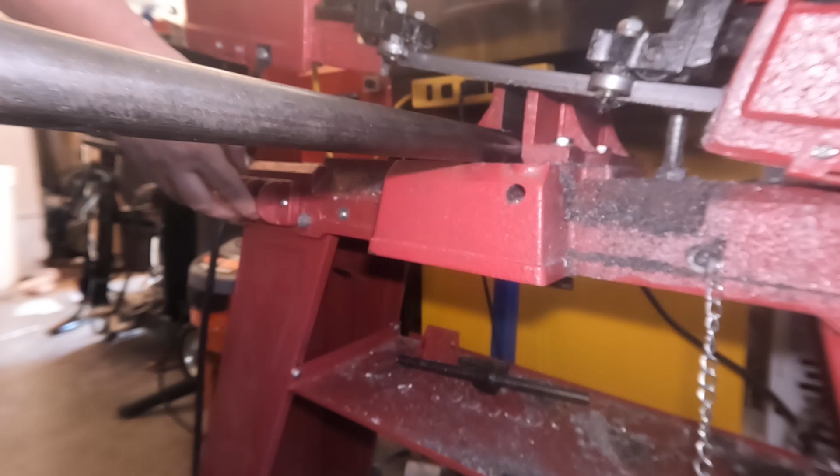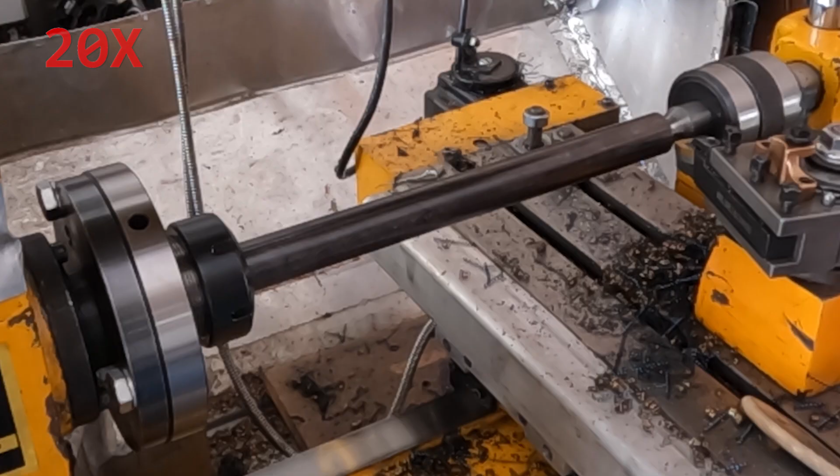Welcome back to my adventures in needlessly making my own parts to refurbish the Anstey Link suspension on my 1949 Ariel VB motorcycle. In this episode I'm working on the guide tubes and sliding member bushes.

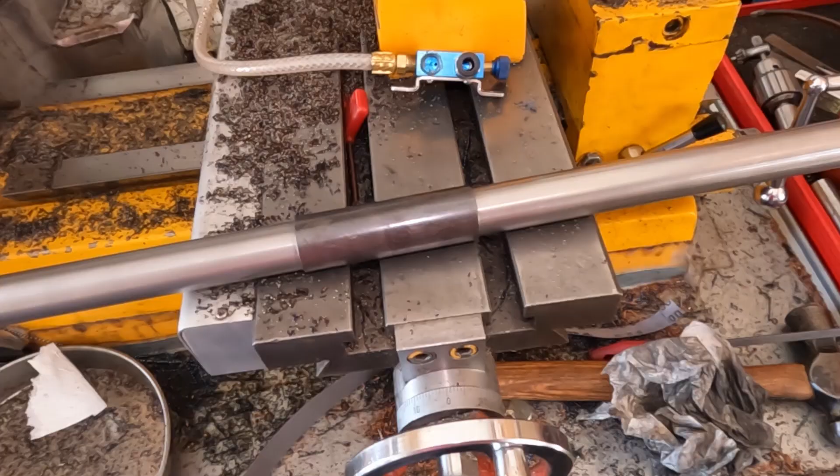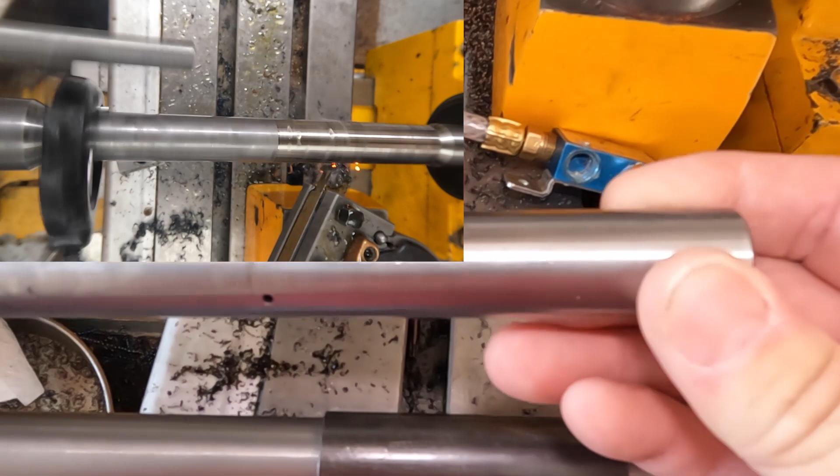So progress has been slow. First I tried to clean up the original ones, knowing it would end up a bit under diameter, but maybe that would be okay. I had a problem with this stuff being really hard, and trying to cut very shallow cuts on it using the carbide inserts really didn't work. Everything was glowing red, and it was catching on the oil hole here as well. So one of these ended up slightly bent, and the other one ended up all scratched up and undersized, but it was an interesting exercise in trying to turn between centers, though I never expected it to work.

So rather than getting mystery metal, I bought myself some 1144 fatigue proof. Bought a 3-foot length of it, cut it in two, so I can get two of these out of each section. I only need two, but guaranteed I'm going to screw some of them up.

And sure enough, this first one that I tried to machine to size got a fairly good surface finish, but one of these ends is 1 thou undersized and the other one's 5 thou undersized, so that was a lesson. The one on the machine here, I took it down to 1 thou oversize and then finished off with the emery strip, which I haven't used before.

I probably should have bought this stuff years ago. It's 400 grit emery, and then polishing it with 1500 wet and dry just for the final finish, and it comes up lovely, all within a couple of tenths of the correct diameter.

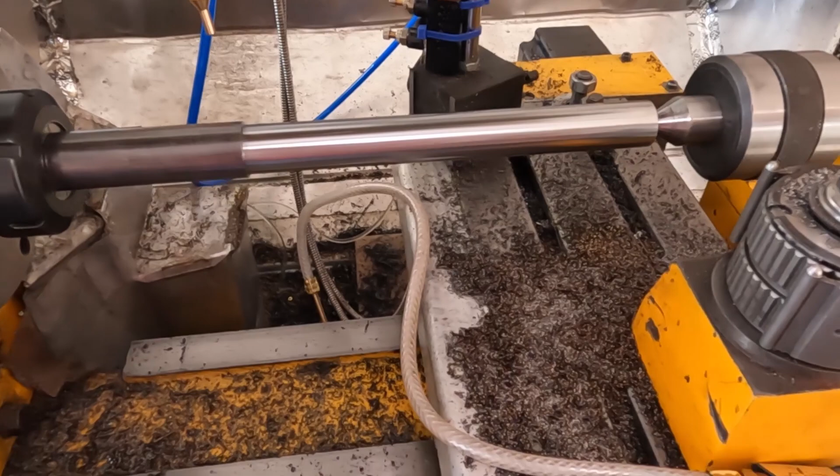Which is 7/8 inch. The reason for this stick out here is on this machine, the width of the table, because it's a mill as well as a lathe, is much wider than you would have on a normal saddle for a lathe, and also the tailstock does not stick out over this thing at all.

So in order to get the reach into here, I have to put the tool over to this side of the table on this slot, and if I do that, I can't actually machine all the way up to the end here, so I have to have a fair bit of stick out here.

Again, compromised machine. It's a 3-in-1. You're kind of stuck with this kind of limitation. But this has now been done on both ends, and it's ready for cutting off.

This slightly undersized one I will also cut off, and I will use these for practice for the drilling operations, so that I can screw up this one before I go to the ones with a good diameter.

This material cost me about 70 bucks. Buying the two parts from Draganfly in the UK already machined would have been £18 each. So this is a hobby for exercise, not for profit. But that's where we're at.

It's taken a while. One of the reasons for the delay was it's getting really terrible surface finish without cooling, and my old Kool Mist, which is the same age as the machine, just gave up the ghost and stopped working.

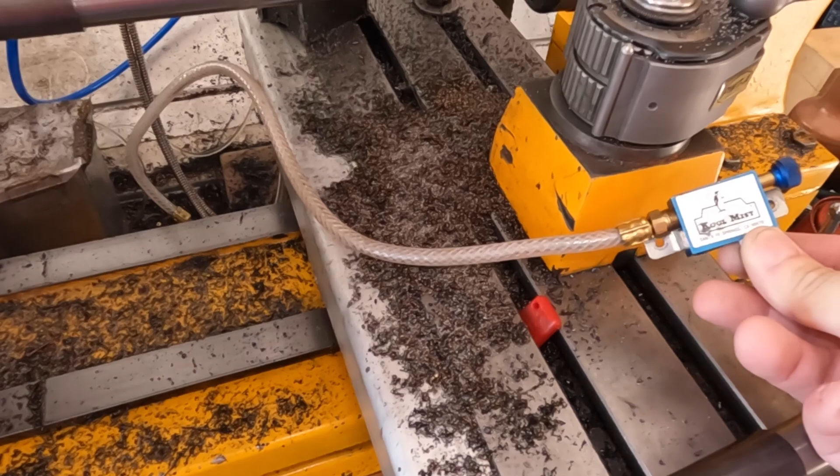I could not figure out how to fix it with cleaning and so forth, so I went to Amazon, bought this thing, which seems to work fine. I have to figure out a better mounting for it, but I need to convert to mill mode to do that, so at the moment it's just cable tied.

But that worked out pretty well, and getting really good cut on this. I do find with the carbide I can't take off less than 15 thou diameter at a time, or it starts to rub and give really horrible results, so it needs to have a reasonable depth of cut.

I probably need to learn how to cut my own high-speed steel tools for this, because that's probably more appropriate tooling for this machine. But that's where we're at.

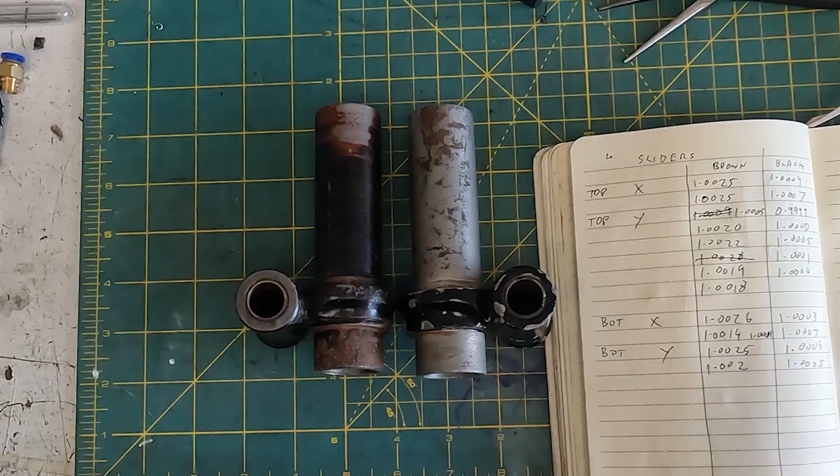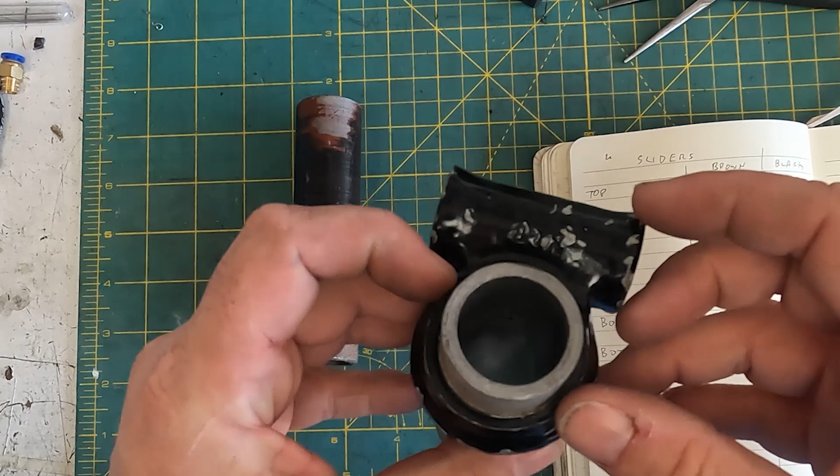So these are two sliding members. Although these are the same part number, they're not from the same years. This one, if you can see in there, there's an oil hole which has been drilled through and then blocked off. The reason for that is they simplified the design, I think around 1953.

They changed the design, 52, 53, and they went from the hardened chromed sleeve here in a bolt to just the bolt. And this bolt doesn't have an oiler in it.

It's not shown here, but there is actually a grease nipple on the top, and then it drills down in the middle, and then there are holes that come out to give grease. There's an indent in that shaft, and then there's holes in this shaft to allow the grease to get out to lubricate that main bearing.

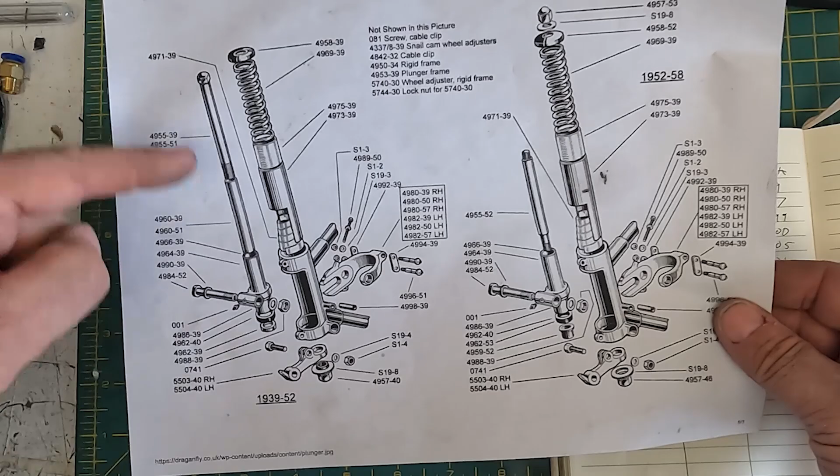They simplified the whole mechanism here and took out that grease point, and instead they added this hole here to grease to the inside.

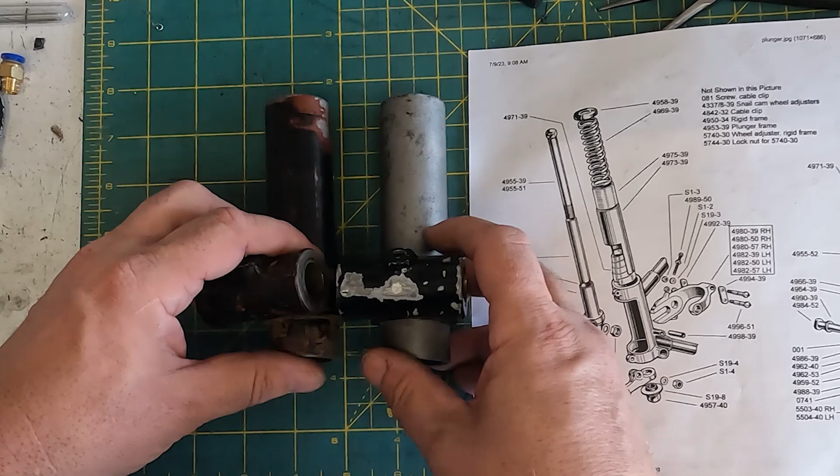I have the earlier everything else, so I can use the earlier type here, and then I'll just have 2 grease points for this side. I could drill this one to be compatible, but I don't need to because I have the earlier setup.

If you do have the later setup here, you do want to make sure that your sliders have this grease hole that's in here. Otherwise you'll have no way to lubricate - you'll be greasing here and there'll be no grease getting through to the main shaft.

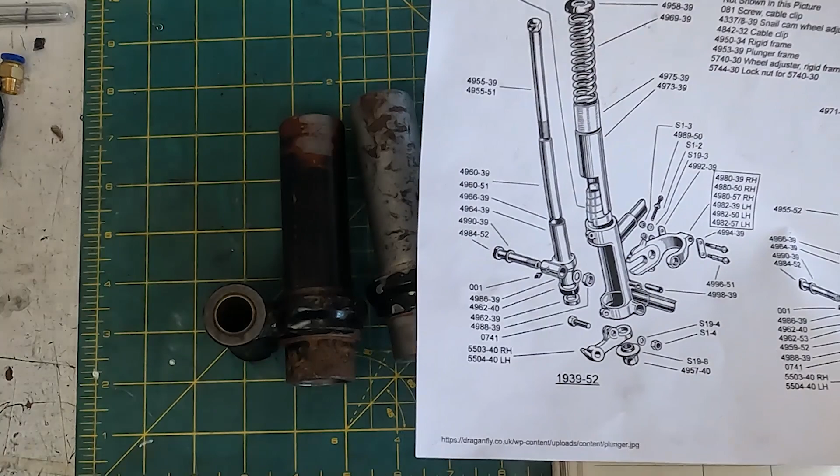So if you are working from a mishmash of parts, or even if you've bought a bike that you think isn't a mishmash of parts, check that you've got at least one of those greasing mechanisms. I'm not going to bother upgrading this one to the later version.

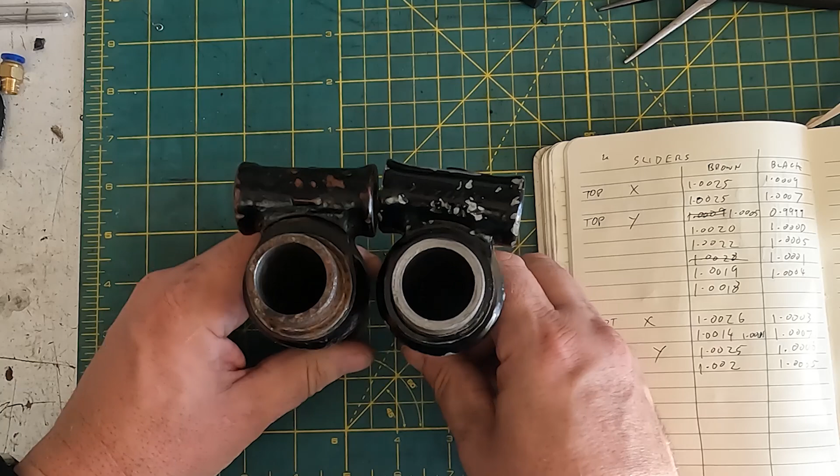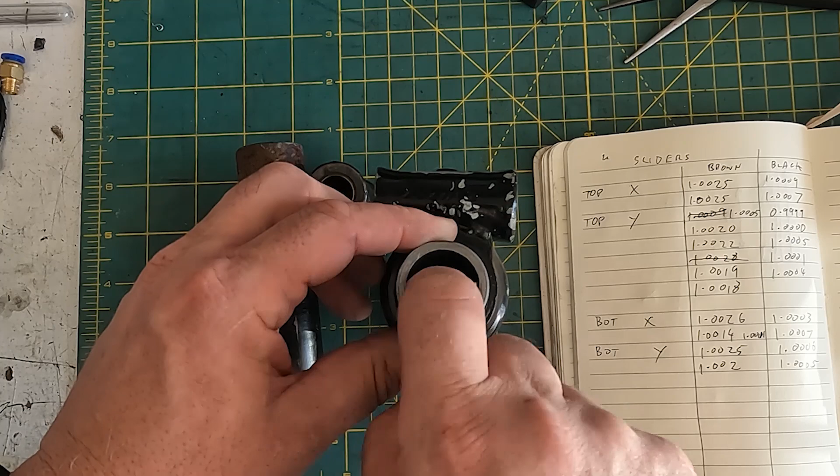It's not necessary. I did check my 2 bores here, and they are not quite the same. They're a nominal 1 inch. This one is a little rougher, and it's about 2 thou over. And this one is more or less spot on 1, slightly over an inch. So this one's about 2 thou bigger than this one.

So when I'm doing the bushings, I want to make sure that I don't mix them up, and I'll make these ones slightly larger.

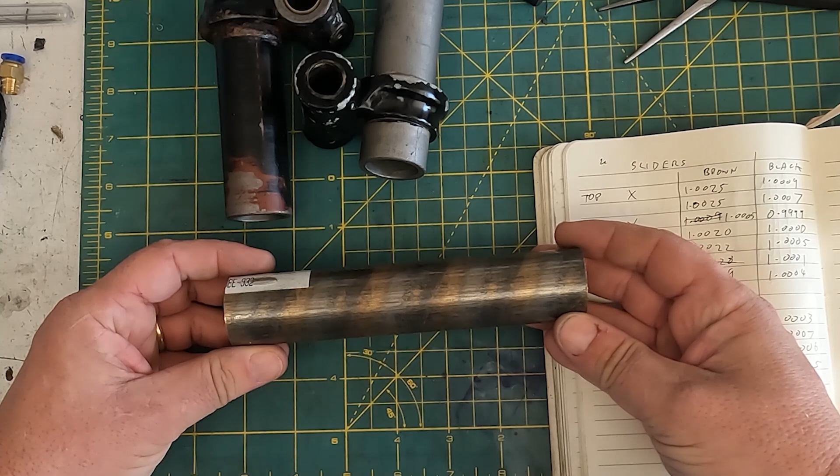This is the material I'm working with. I tried setting it up in the lathe to see if I could grip at one end. I've got enough here that I can make them about 1 3/8 inch long, which I think is about right. I don't have the actual original spec, but from the pictures I've seen, it looks like they're about 1 3/8 inch long, or 1.5.

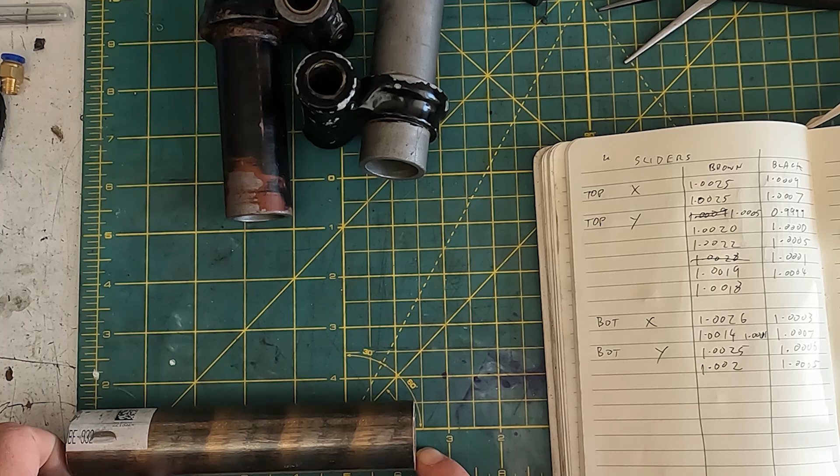So I can get 4 out of this piece, and we're going to take most of this metal away because this is 1 1/4. Our normal outside is 1 inch, and our inner here is only going to be 7/8. So we're going to end up with a 1/16 of an inch thickness bush.

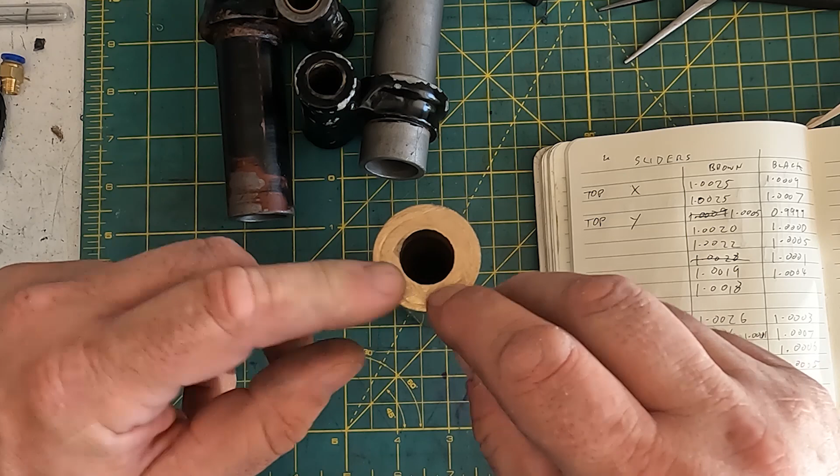So what I'm going to do is cut this in half because this is really too long to get good stability for machining, and then cut them in pairs to the right OD. Do the ID to close to the final depth, but not all the way, and then part them off, and then put them in, and then bore through.

Reaming would be an option, but I would need a 3/4 inch reamer for like 35 bucks, and then I might need a slightly over 3/4 inch reamer, which would be another 50 bucks. So I'm going to bore instead.

This is a boring bar I have, which should be able to get all the way through, with 2 screws on the post. It's fairly rigid. This is about the biggest boring bar you could get into that hole, so I may start off with a smaller boring bar, get it close, or drill, and get it up to there.

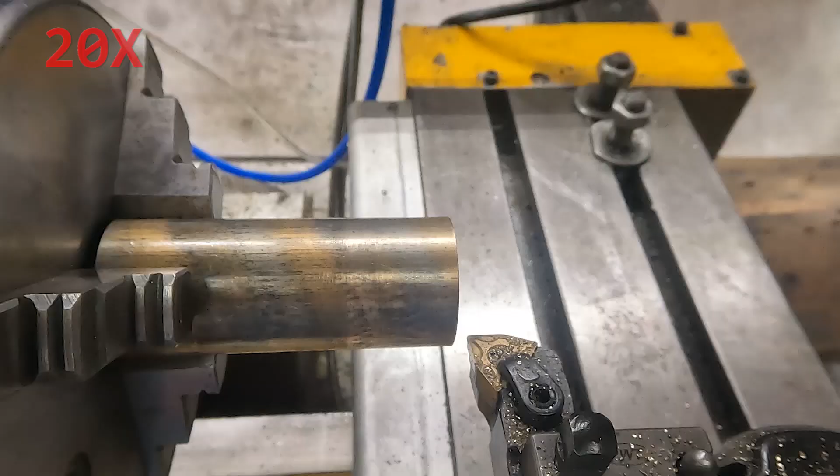That's the plan. Apologies for the weird strobing on this particular bit of sped up video. I have no idea what's going on. If anyone has any ideas, let me know.

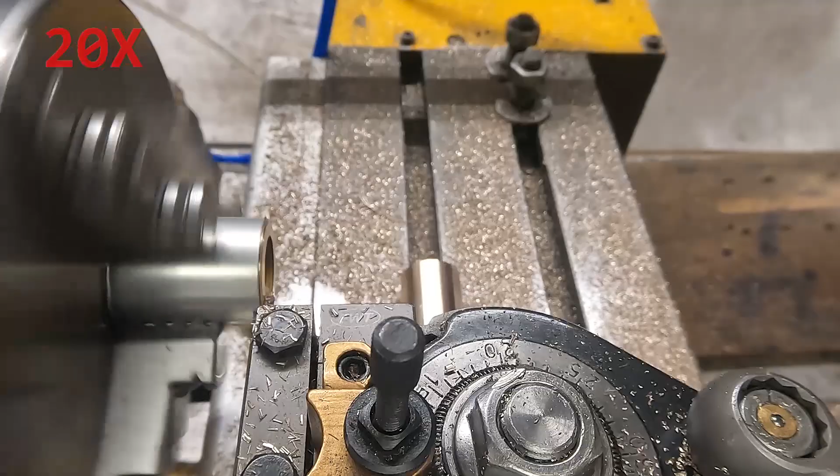So my little baby arbor press is not big enough for this job in any way, so I have to come up with another solution.

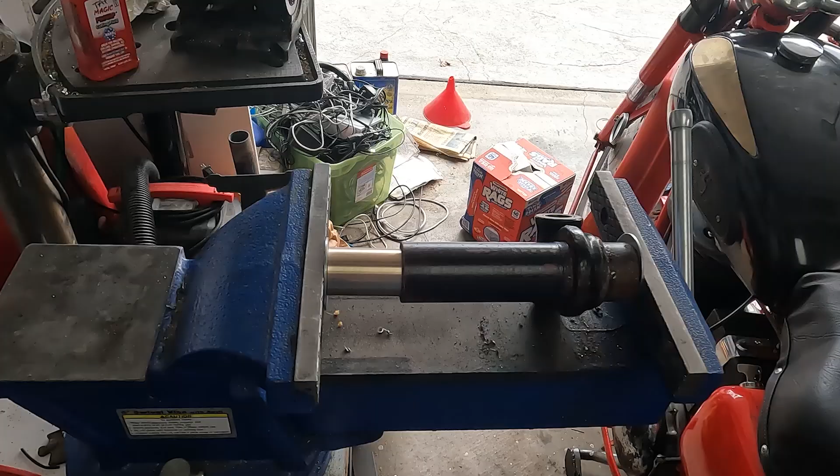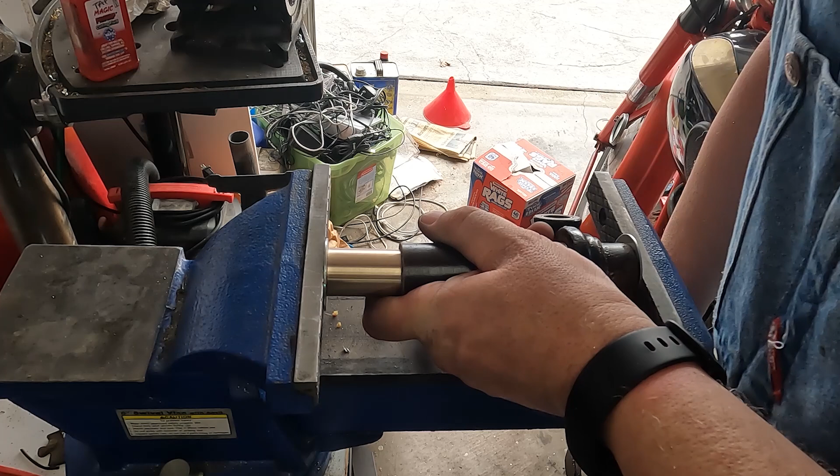Okay, we'll give this a try. Might work. Yep, it's going a bit. There we go.

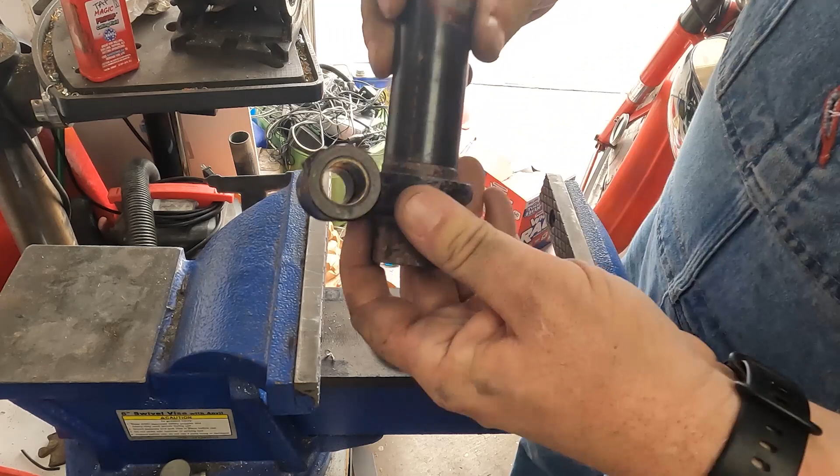Of course, if I had a bucket of liquid nitrogen like that Australian guy, this would go a lot easier, but this should do. That is in, yay! So, quite happy with that. That is in, and we just need to do the other one, which I'm not going to film.

So what we're doing here is bringing out the bores to about 20mm, because my largest boring bar, which is the one that can reach all the way through this, will not go in the initial hole size. It starts at 20mm, so I'm going to bring this out to 20mm using the smaller boring bar, doing both ends in the 3 jaw, and then I'll get it properly trued up in the 4 jaw, the big 4 jaw, and take it out to final dimension with the 16mm boring bar.

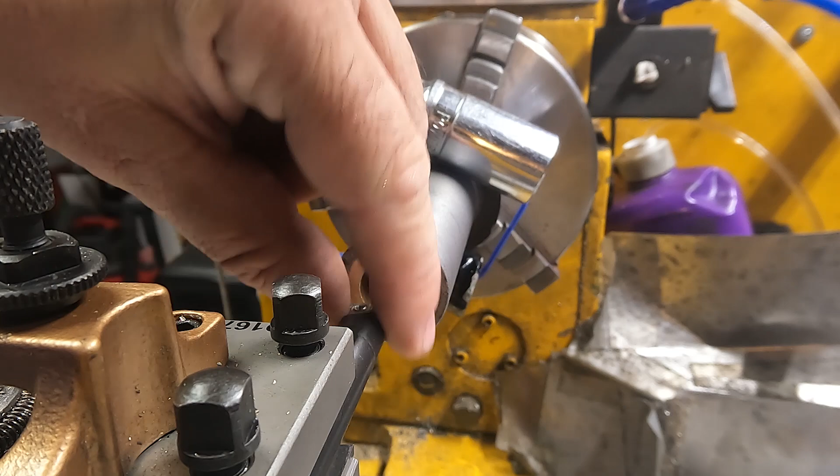This dodgy setup here is just to provide some counterweight to reduce vibration. We're not going that fast, but might as well. It doesn't seem to be dangerous as long as I don't stand in front of it, so we'll see how it goes. I haven't zeroed this boring bar yet. I'm just going to take it in, then take a reading and set the diameter. Just do it by eye.

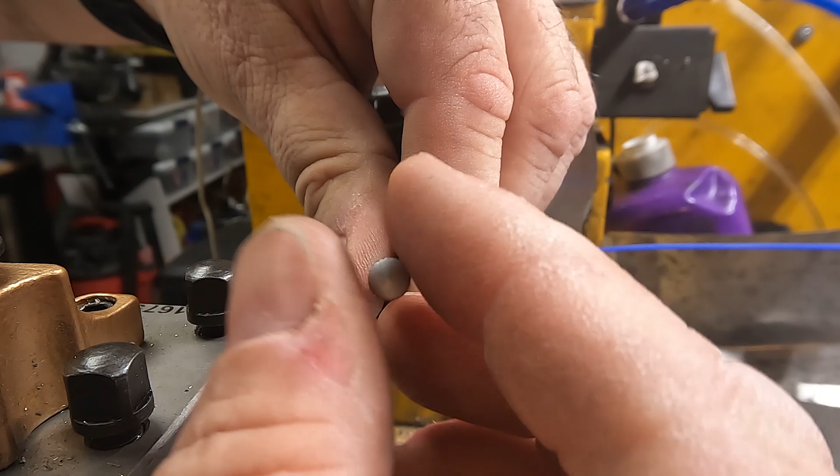Probably close enough. It's 20 millimeters, so that's good.

So now I just flip it end for end, do the other end, and then do the other unit, and probably get another weight so I don't have to redo the cable ties for the other unit. And that will be that prepped for the main boring bar, which will be a whole different setup.

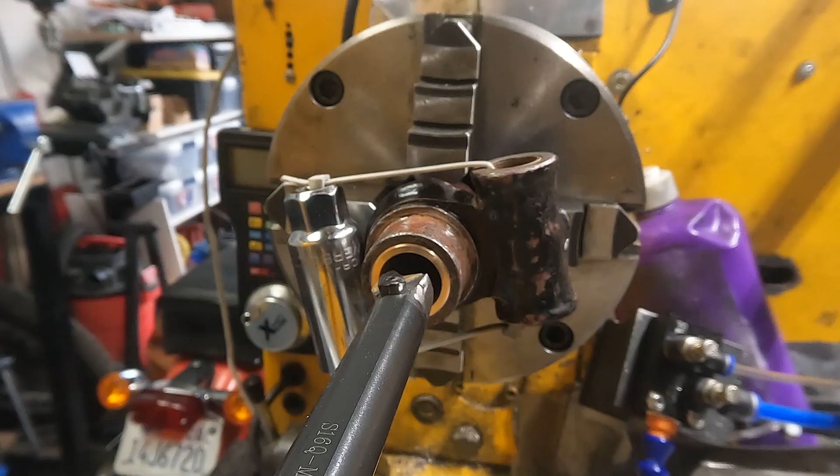So the plan was to use this 16mm boring bar, which is an S16Q MWLN R08, which according to various online information I got has a minimum diameter of 20mm. So I've bored the bores from each end with a shorter boring bar out to 20mm, and then I went to mount this thing up and there was no way it was going to go in that hole. So I guess I have a cheap knockoff of this boring bar.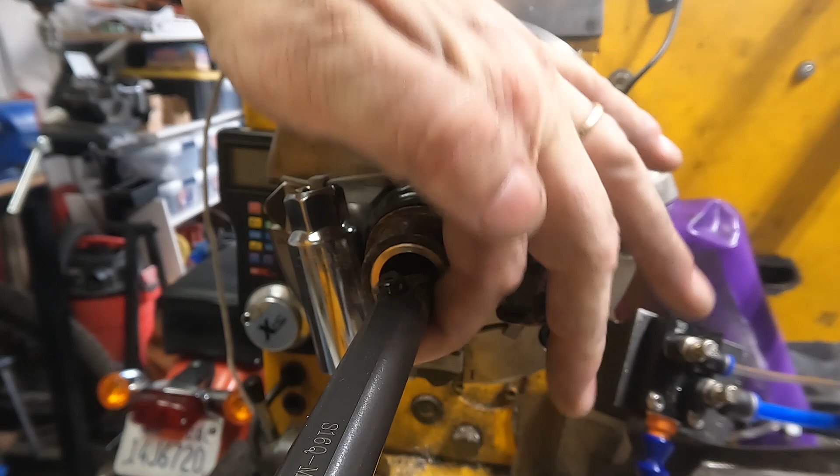So this connector up here was sticking way high, so it's been ground off, and there's been some metal ground off here, and it now goes in the hole and it just scratches off down to here, but then the main shank very lightly touches on the back, so it's not going to go in the hole unless it cuts its own hole. So I'm going to start off manually with 40 thou above where I'm at, which is going to be out to 21mm.

We're going out to 7/8, which is 22.2 something, so we've got plenty, we should be able to do it. But I'm going to go in manually with the pendant and find out how deep I need to go in on the first cut, and then I'll set up my program to do both bores. So it's going to bore, rapid to the other end, bore, come back out so it has clearance, come back out to the front here, and then come out to the side so I can measure. That's the plan, so we'll see how it goes.

So things are falling apart. Let's try that again. I'm going to touch off Z first.

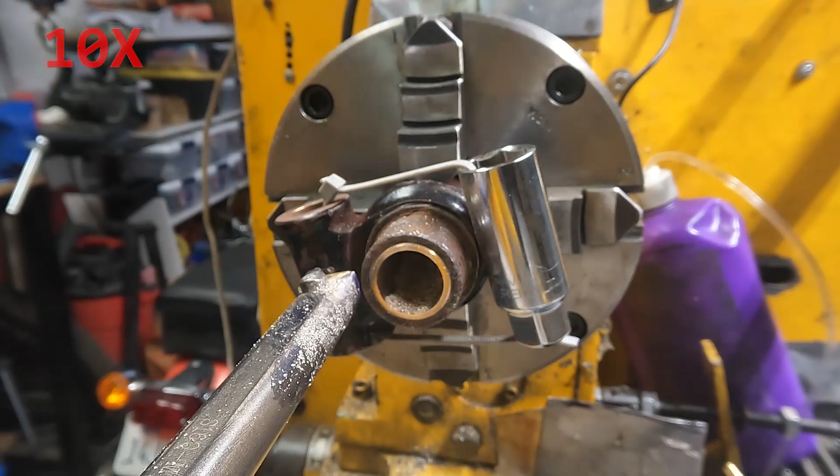So, a couple of spring passes in. Spring passes are getting very loud. Oh, there's a crap load of chatter in there. This is not going to work. So now I know why people do line boring.

So as long as I have a decent depth of cut, I get a decent finish. But once I start getting down to the smaller depths of cut, I get a crappy finish. And there's also a significant amount that comes off with spring passes. So getting the final dimension here is going to be extremely hard. I'm very likely to bugger this up if I keep at this.

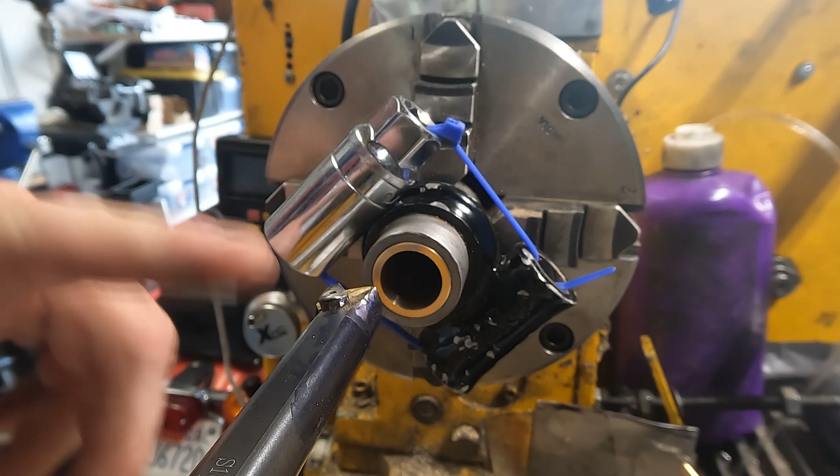Okay, on to the second one. Lessons learned from the first pass: this has been trued up with the dial gauge, so it's now fully parallel. It was slightly canted before, which messed things up. Dropped the speed down to 160, which seems to address the chatter issues somewhat, which just means it's going to take a lot longer. So I'll try to do the same thing, but it's going to be a lot slower, so the video will be sped up a lot more and skipped and all the rest of it.

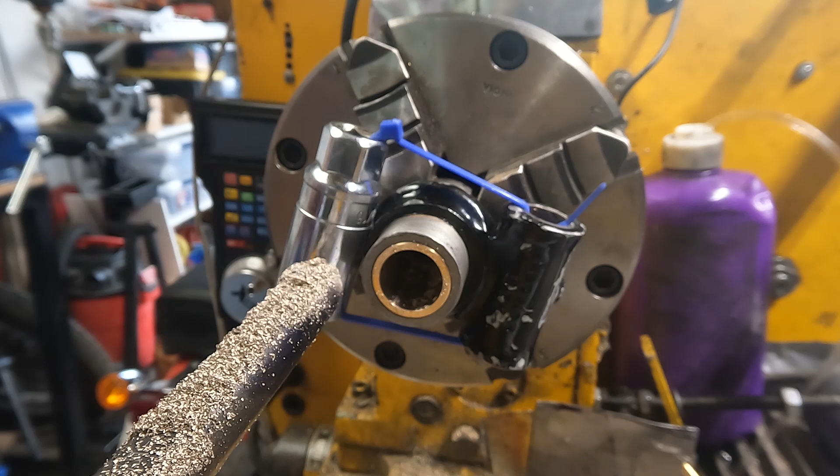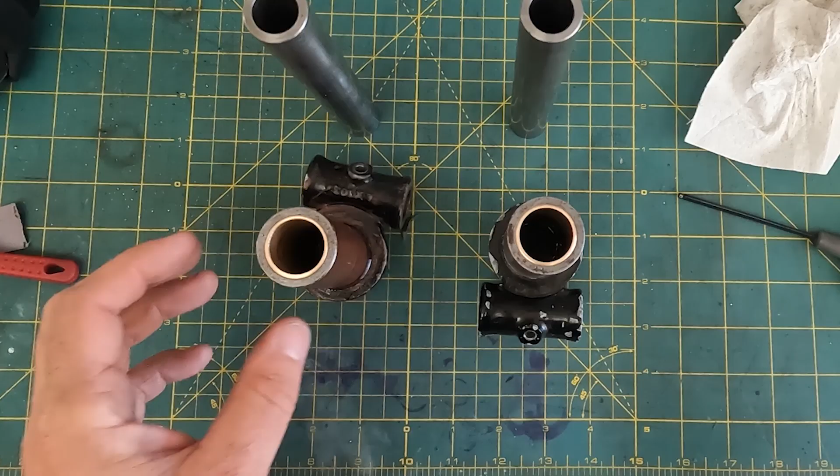Oh, much better surface finish. So in the end, I was able to get it to work. This is the first one, as you can perhaps see in there - there was a whole bunch of chatter marks on there. 5-inch stick out on a 16mm boring bar. It's clearly not the right thing to do, but it's what I did.

So the chatter marks, it is bearing on the high part, so I guess that might be grease retention. It might just wear out early and I'll have to do it again. But I did get a good sliding fit. This side does not have the chatter mark, so it was bored this way in, so most of the chatter was on the deeper end, which is weird because the stick out's the same on both, so why would it make a difference?

And that became - I think I figured that out on the second one. I dropped the speed all the way down to 160 RPM and I got a much smoother fit. Going in, I take off like 30 thou, then do a spring pass and take off another 5 thou, and another spring pass would take off another 2 thou. So clearly a whole bunch of deflection in the boring bar.

Chance of overshooting high. So in the end, with this one I stopped cutting like 10 thou before and started doing spring passes until it didn't take any more. Each spring pass is taking like 20 minutes because I'm going so slow. And then just gave it another couple of thou until the shaft would actually slide in, and then I stopped.

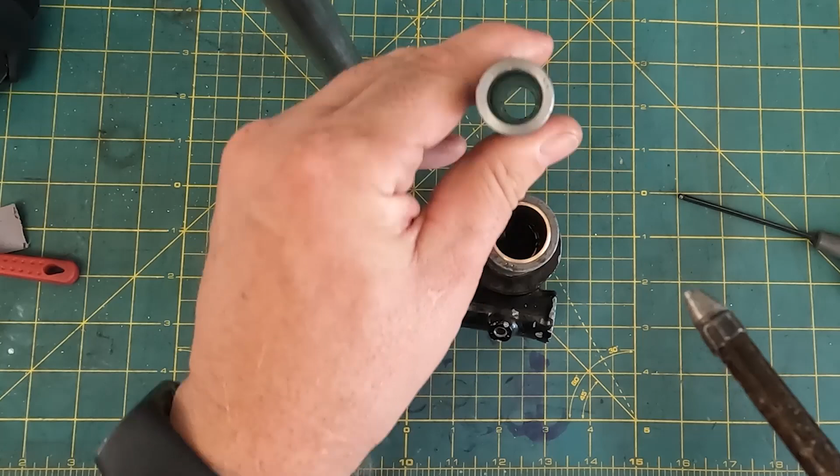And these are also stamped - got each of these stamped for which way up they go and which one they go in, because these are off from each other by about 2 thou in diameter. There may be a little bit of taper going on as well. So as long as they slide up and down and go in the same way, they're kind of hand fitted to each other, which is pre-industrial revolution, old school.

But I'm gonna go with it. I think it'll be okay.

Give them a little bit of oil. These are going to be greased, but I'm just oiling them just now for assembly purposes. And it should just go in there - it's pretty smooth, as I say, very snug, because I actually rubbed out the final tight spots and wore them in by hand.

So these are too close tolerance for final use, but they'll run in. They're not binding - they should not bind, particularly not with actual suspension forces on them, they shouldn't bind. That one there might have to be redone because it may wear out early.

They both go together - this one is slightly looser than the other one. This is the one I had to actually sand in, so there's a little bit of resistance, but I think that'll wear in. These still need grease holes put in them in the shafts, but I think the next thing I'll work on is making a set of pullers or pushers for removing these old bushings in here and also in the other components. There's different sizes of bushings.

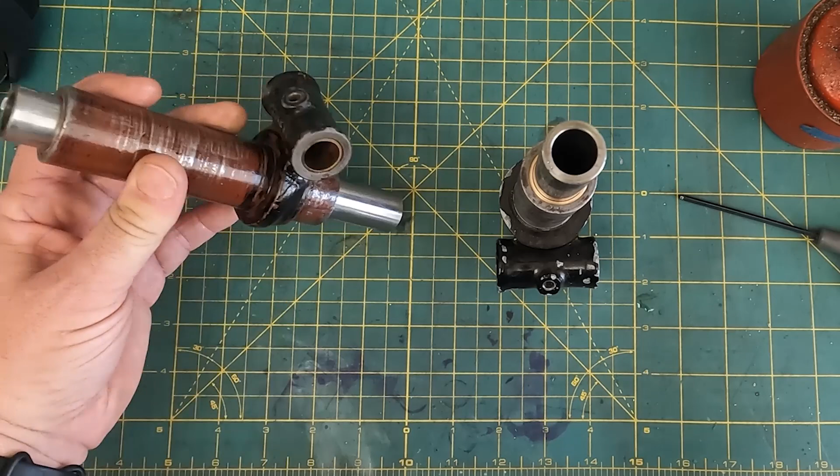I'll make up drifts that I'll be able to remove and insert bushings with, made out of 12L14. So this has taken a long time to get this far, but I didn't destroy the material. I did get working components out of it, so I should be happy. But it did not go well - it did not go well at all.